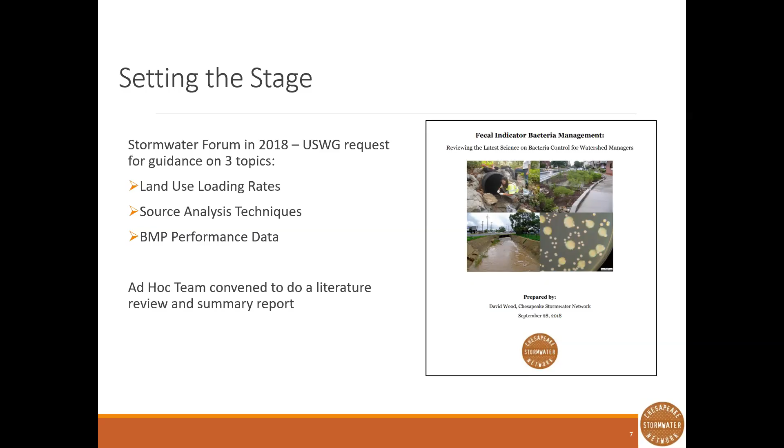So we put together an ad hoc team to do a literature review and summary report, which you can find on our website. A screenshot of it is on the page right now. But basically, I just wanted to touch on some of our findings because I think it's a pretty good segue into what Kim is going to be talking about today. And a lot of this, I think, you all who work in bacteria management probably already know, or at least anecdotally are familiar with, but was definitely confirmed as we looked through the literature.

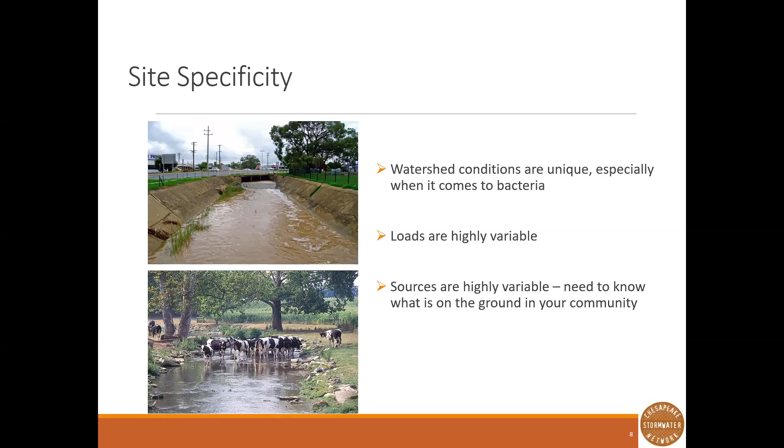And a lot of that is site specificity is really important for bacteria management. Watershed conditions are really unique, especially when it comes to bacteria, and so loads are highly variable. So it's very important to know what's on the ground in your community rather than making larger generalizations. And so, along those lines, when it comes to accounting for bacteria reductions, if it's under a regulatory framework or something like that, it's difficult to set something up the same way that we do for nutrients and sediments.

There is not really any support at this point for loading rates for fecal indicator bacteria based on monitoring data. So, you can't say that we have a certain number of colony forming units per acre of impervious cover or acre of row or turf grass or something like that. It's too variable across the landscape. And similarly, BMP removal data is highly variable as well.

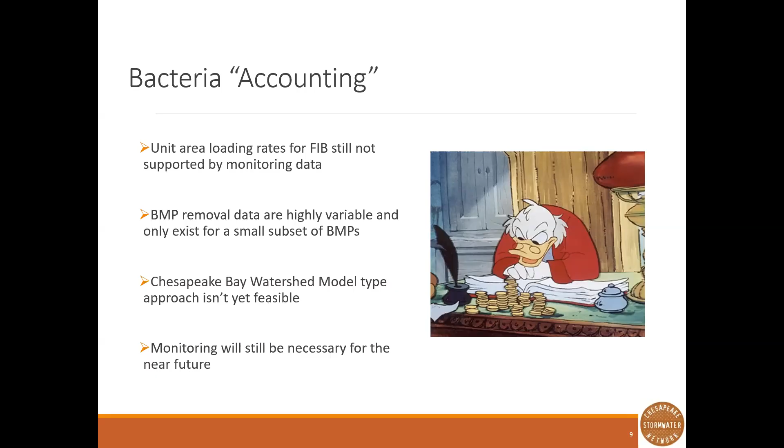There's a couple of BMPs that show some promise as far as providing reductions in bacteria, things like bioretention and some constructed wetlands, but there are a lot of site-specific factors that go into how effective those are, and field studies can show anything from almost 100% removal of bacteria to your green infrastructure practice actually being a source. If, for instance, geese land on your wet pond and you have an actual input going on. So the dynamics make it really difficult, and so monitoring is still going to be really important. It's really a combined approach that is still best practice.

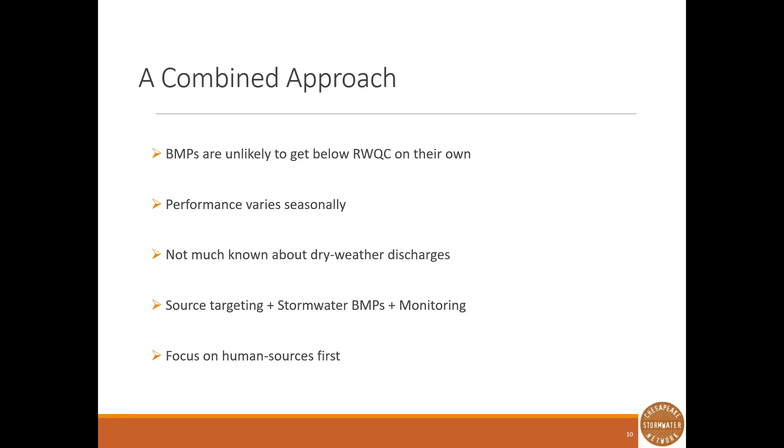There are still a lot of information gaps about seasonality. Dry weather discharges can be really spotty, as you know, and so a combined approach, looking at source targeting. Maybe you throw some BMPs in there, but they're probably not going to be doing a lot of the heavy lifting, and then you're monitoring. And so that brings us to our topic today, and that's really doing our sleuthing for bacteria sources. A lot of them are hidden in your existing infrastructure, so you have to do a lot of work to identify and track the sources for the biggest impact so that it's cost effective and also providing the public health benefits that you're looking for.

And so I have seen Kim give a version of this talk before and was very excited to have her on to talk about what they're doing in Baltimore City with regards to bacteria monitoring. And so I'm going to go ahead and introduce Kim now. Kim Grove is a professional engineer whose 20+ years of experience has spanned the spectrum of civil engineering, including stormwater management, land development design, environmental site assessment, remediation, geotechnical engineering, and forensic analysis.

...construction management, and materials testing. A graduate from the Florida Institute of Technology, Ms. Grove spent most of her career as a private engineering consultant, working throughout the Southeast and Mid-Atlantic region until she joined the Baltimore City Department of Public Works in December of 2010. Ms. Grove currently serves as the chief for the Office of Compliance and Laboratories, which is committed to enhancing environmental regulatory compliance for the department through collaboration, management program improvements, and regulatory enforcement.

So I'm very excited to welcome Kim, and you can go ahead and take it away. All right, thank you very much. And good afternoon. Thank you for taking the time to listen to this presentation on Baltimore's approach to bacteria monitoring and investigations.

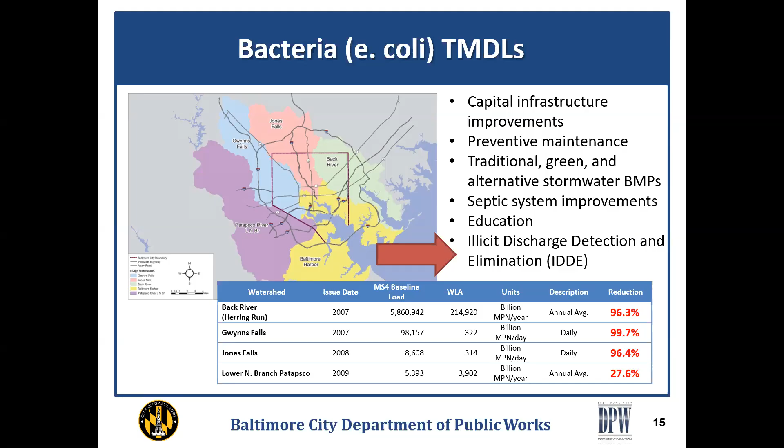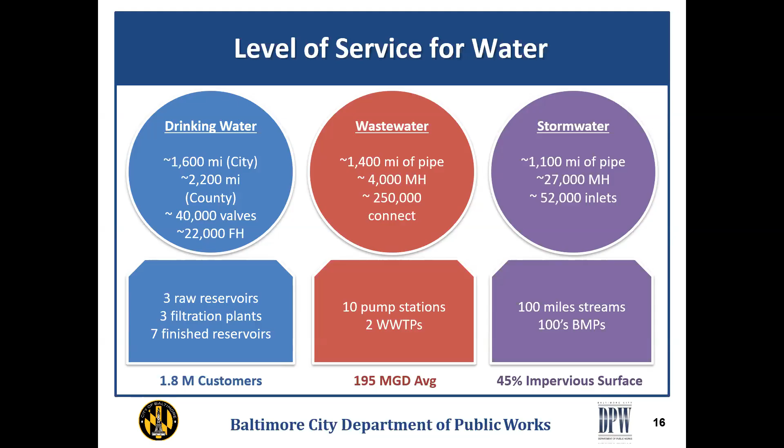So within the city, we have a lot of pipes. If you recall, I said that we were about 82 square miles, but collectively, we have almost 4,100 miles of drinking water, wastewater, and stormwater pipes crossing underneath our streets. So it's a very high density of pipe networks, and most of those pipes are past their life. So they're in bad shape, they are leaking, or they have enough cracks or separation at the joints that they're allowing for infiltration to occur. For the City of Baltimore, the Department of Public Works is a local government agency that acts like a regional utility.

On the previous slide, I had noted what we have for pipe networks within the city, but we're also responsible for the drinking water distribution that extends out to the counties, as well as providing drinking water for other surrounding counties. And then on the sanitary system, we operate 2 wastewater treatment plants. So our collection system is not only what is within the city, but also what we are collecting from the adjacent counties.

When it comes to IDDE, there are a lot of sections and divisions within the department that assist with the IDDE program. My Office of Compliance and Laboratories takes the lead at the beginning and at the end, meaning the detection and then the verification and elimination. But along the way, the Bureau of Water and Wastewater Utility Maintenance Division, the Office of Engineering and Construction, and the Office of Asset Management work together when we have to focus on that elimination part.

And then if the source of the illicit discharge is coming from a private property, then our Office of Legal and Regulatory Affairs may come in to assist with the enforcement of local laws that allow us to get a closer remedy. There is also a Department of Housing and Community Development, which is responsible for the plumbing codes and can also have authority to go onto properties. So they will assist us at times if we are dealing with private property owners. So it's not just about the pipes, it's also about the people when you want to develop a good IDDE program.

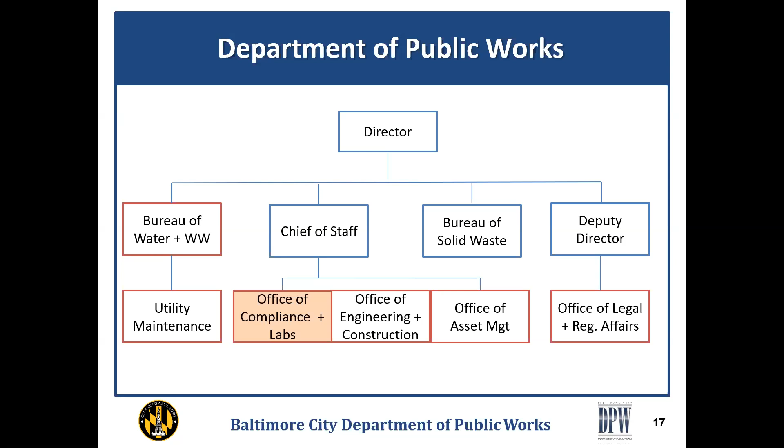Specifically within the Office of Compliance and Laboratories, the Water Quality Monitoring and Investigation section is responsible for IDDE. It's 13 positions that are scientists and engineers. We have a $2.2 million budget that is funded by the water utility, wastewater utility, and stormwater utility. And within that budget, it's mostly focused on operations, but we do have certain partnerships and volunteer programs that we assist. An example is some of the research that I'll be talking about later on related to microbial source tracking.

The bulk of our efforts go into a weekly screening program that we have at 88 locations where we monitor for the water quality indicators that are listed there on the right. But in addition to that, we also do a monthly stream impact sampling. In the spring, we'll do a biological assessment. We do have to respond to our non-emergency requests related to polluted waters.

As part of our MS4 permit compliance, we have to sample during storms. Related to our consent decree for SSOs, we do confirmation of abatement as well as large SSO sampling. On top of all that, this office is responsible for a flood alert management system of several stream gauges and rain gauges throughout the city. And we also provide education through our public school programs.

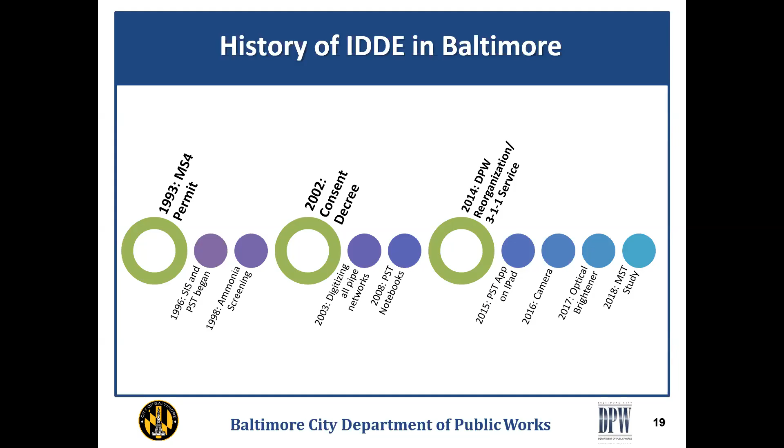Then, if you notice on this history, every year we were doing something new, either a new technology, like putting an application on an iPad, which was much more real time, adding more types of cameras for our staff to use. In 2017, we added an optical brightener piece of equipment as a supplement, because sometimes illicit discharges related to a sanitary discharge are not always about bacteria. Sometimes it can be related to detergents. And then finally, in 2018, we started our microbial source tracking study.

So our investigations, by and large, are started because of our routine sampling. And in the Chesapeake Bay program expert panel on IDDE for gray infrastructure, when they talk about an enhanced IDDE program, they really want to see something where you're not reacting to a complaint, but that you have a systematic methodology for detection.

And as you can see, we've done over 2,000 investigations since 2008, and the vast majority of them were started because of our program. And about 48% are done within 1 day. So when we have to do an investigation, a lot of times, because we have our protocols set, we can identify the source within 1 day. But I do want to let you know that 30% usually stop or no source is found. Not every investigation is going to end up where we can find it. And we average right now about 180 investigations per year.

So in addition to our routine sampling, we have a dedicated group of about 5 field scientists who are routinely focused on these investigations, plus an engineer who can help work through what the remedies may be. And these are just some of the statistics coming off of our hotline, or 311 for polluted waters. What this all comes down to is about 1 in every 20 calls that we get may actually result in an illicit discharge being found. And I just want you to note how few complaints we were seeing in 2019. Keep that thought in mind, because we're going to come back to it later on in this presentation.

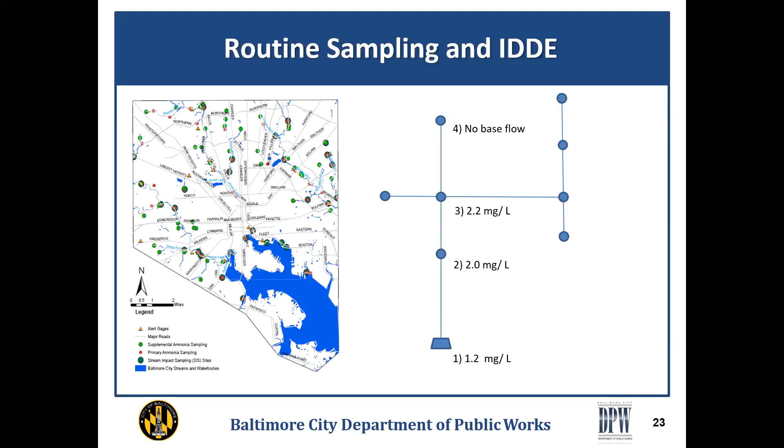If we went to the west and found a lower ammonia reading, that's not where we would go. So if we headed east, still seeing it come up high, that would be making sense, but heading south, that would show us that the illicit discharge was not coming from the south. We would then move north and see a very high discharge. It would say that we're getting closer.

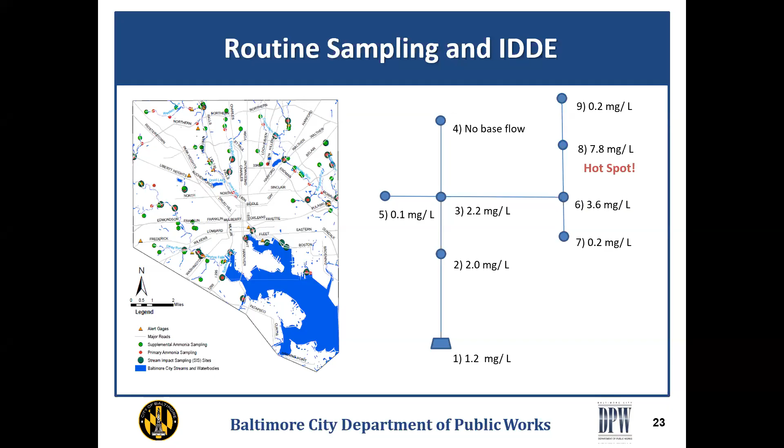Going up one more part, we would see that, oh, that ammonia has come down. So then that would identify that that manhole is our hot spot. That is the area that we would want to concentrate. And this type of backtracking and looking at the ammonia screening, we call this a phase 1 of our pollution source tracking. And we would then move into a phase 2, which is a visual assessment tool.

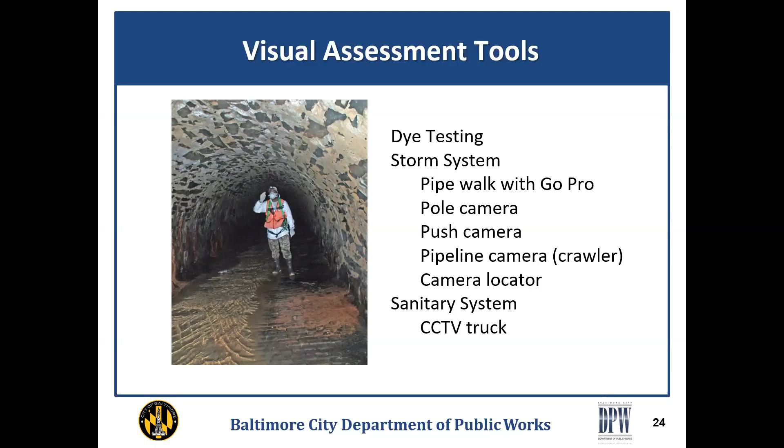And then if we can, we work with our utility maintenance division so that they may CCTV the sanitary system to see if there's any cracks or anything within that sanitary system. A traditional dye test would be done where you would deploy the dye into one manhole, you would wait, and then hopefully you would see it show up in the storm manhole downstream.

However, what that does is it just allows you to see the dye going across that length in between those two sanitary manholes, that's where it's coming from, but you're not quite sure where within that 400 length you may be seeing it. And what we started to see is that if we just said it was a segment in between the two manholes, the cost of that repair was pretty high.

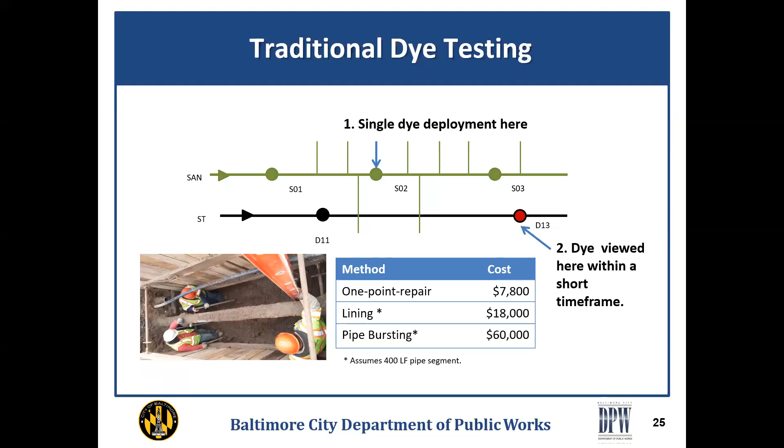So we tried to look at different ways where we could pinpoint it down to only a small location and get a one-point repair. If you're lucky and you're able to do the CCTV and you can find that crack, it's easy to identify the one-point repair. But there are times where the crack may be submerged with the base flow within the sanitary system, or it may be minor and not able to be picked up by the CCTV. So that's why we started to look at different alternates.

And this is one of our great low-tech ways of doing it. Instead of just pouring all of the dye, we have created almost a tea bag of dye solution, and we attach it to an empty bottle. And then what will be done is we will pull the bag along about 5 feet, wait some time, see if we're seeing any dye, pull it another 5

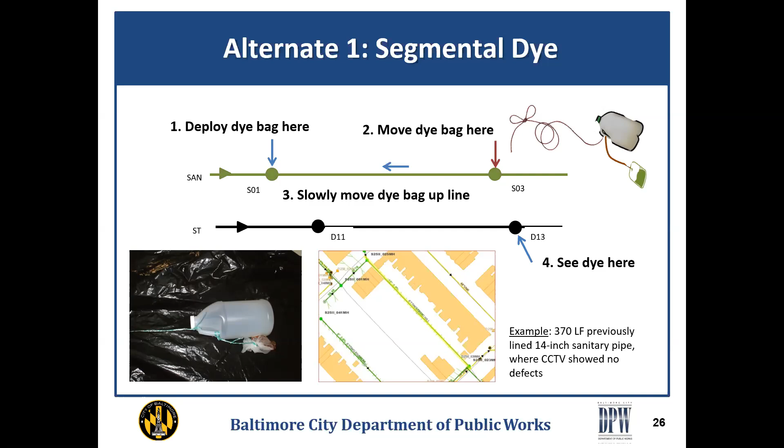feet, and then keep continuing on until we get to a point where the introduction of that dye within the sanitary system starts to show into the stormwater system, and that helps us to pinpoint where we should be looking for the break within the sanitary system. And this is just a visual of how that tea bag looks.

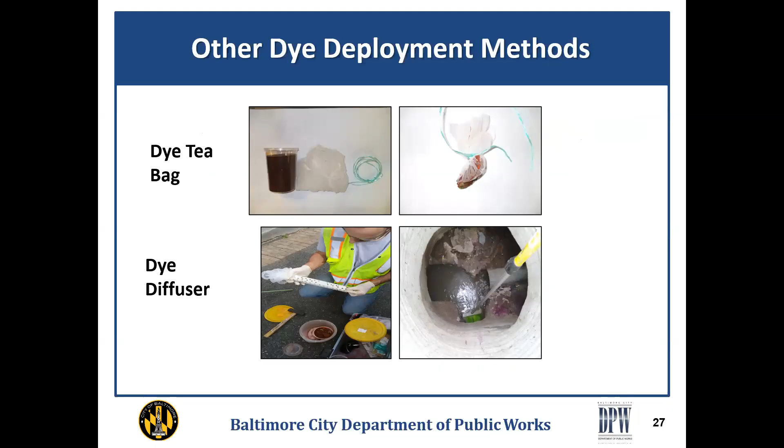We've also developed a very low-tech dye diffuser, which allows for us to introduce dye within the manhole if you've got multiple ways for the sanitary system connections to be happening. So another alternate that we've had to employ is actually a mass dye.

And this particular time, we had an introduction of illicit discharge within the stream, and it wasn't coming from the adjacent pipe. So we had to do a mass dye deployment from certain locations to finally understand that the break was happening further up in the system, but it was coming through the underdrain within the sanitary system.

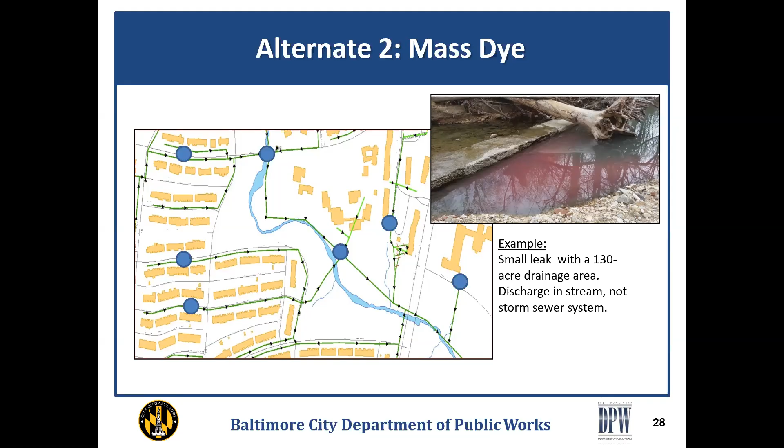And then another alternate that we looked at is this scenario where the adjacent sanitary system next to the storm system was not the part where the illicit discharge was coming from. It was actually from a concurrent sanitary system or a parallel sanitary system, but it was almost a block up. So what we had to do was introduce the dye and then keep a flow monitoring camera to wait almost 24 hours to see when that dye came in.

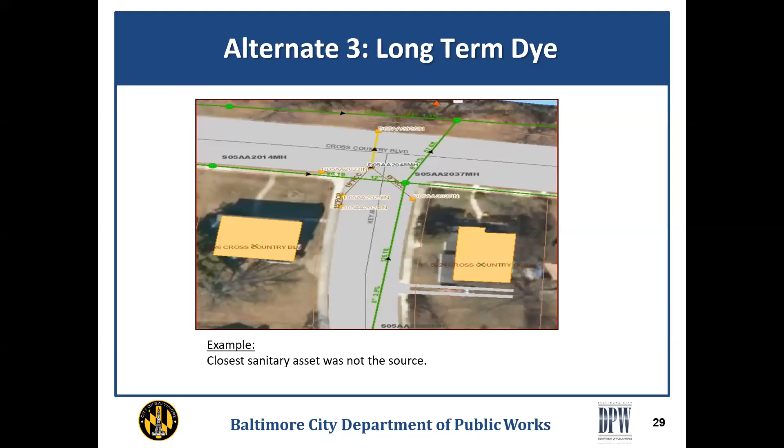Because what was happening is there was a break within the sanitary system. It was coming through some of the gravel that is under the underbed, and then finally connecting into the storm drain system. And when you're in an urban area with so many different pipe networks, that gravel bedding really plays a confusing complication in trying to backtrack where your illicit discharge is coming from. It almost mimics a karst terrain.

So this is one last case study that we had. This was in a downtown area of the city. In addition to our routine sampling, we had been doing outfall sampling along the harbor and saw very high ammonia nitrogen levels. So we backtracked it a couple of blocks, but we did the dye testing just within the public system. We couldn't see any introduction of the dye, but the ammonia levels, and we also had it verified with bacteria tests, were showing that there was some type of sewage coming into our storm drain system.

So this investigation took several weeks. It was very complicated because you're in the downtown area, so the maintenance of traffic was difficult. Even though the services may be one or two services to the building, there were a lot of different storefronts and fixtures that could have had that introduction.

Long story short, what we found was it was actually a high-rise condominium, and a quarter of the condos had their plumbing system connect into the storm downspout. So you would have never seen it in any type of connection to the main part of the storm drain system. And the only way we found it is that we thought to not just introduce dye at the base level, but to try various apartments within that high-rise.

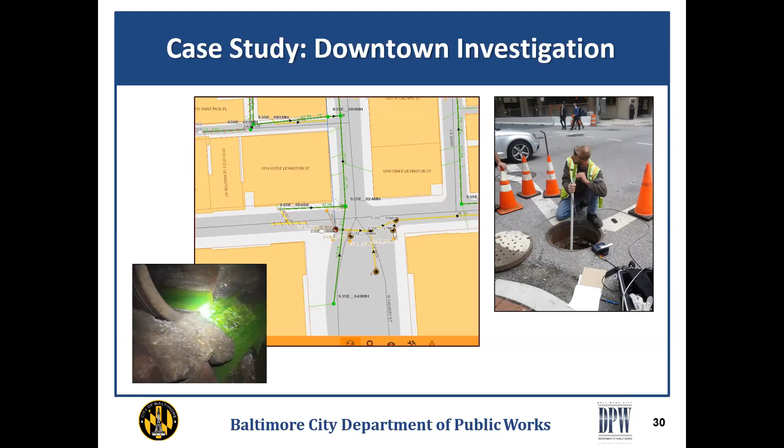So finding the source of your illicit discharge is one part, but that's almost the easy part; as the data showed, a lot of times we can find that source within one day. And when we backtrack that source to actually being on a private property, that's where things really take a different turn, and communication starts to become our greatest tool. Usually we'll go through the routine of notification, then educating before we go into enforcement, and then abatement. But you have to be ready to have communication in several forms: email, person-to-person talking, phone calls, direct mail.

And at this point, that means communication will likely happen outside of the normal work hours of 8:30 to 4:30. If you're lucky, just the notification can go to abatement. But through our experience, we find that education and enforcement, more education tends to be effective, and then finally the enforcement side of it.

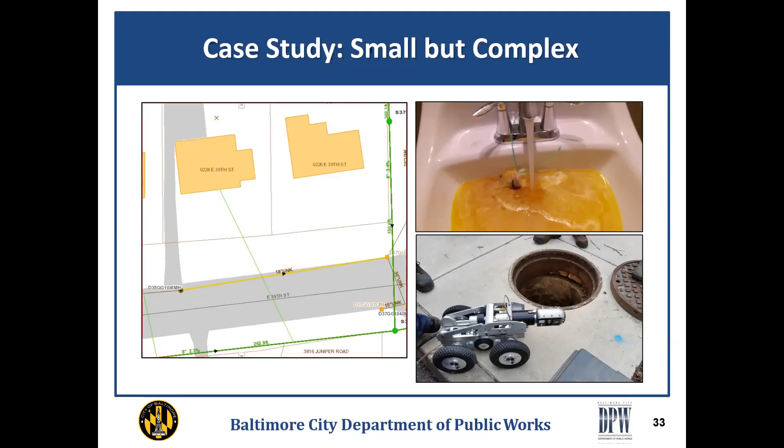And this was also very difficult because their plumber was showing that he had CCTV'd and was not seeing any large cracks, but dye tests were showing a different story. We also noticed that the dye wasn't coming into our storm system through any crack within the storm system. Instead, it was releasing to their private downspout connection. This took a few months to remedy, but the continued communication with the property owner really paid off for us. So there will be times when we use all the tools in our toolbox and we're still not finding the source.

And this is when microbial source tracking has come into play. We have been working with the University of Maryland, Baltimore County, as well as the University of Baltimore in trying to do this work. What we have recognized, though, is that microbial source tracking isn't your step one. It's not even your step two. It should be used when you've exhausted everything else.

What we did was we started to compare some of our known samples and also some of our locations where we knew that there was no sanitary sewage coming in to try and establish what we wanted for a threshold. And for us, we used the human markers being at less than 1% to say whether or not we would continue an investigation. Through 2 fiscal years worth of sampling, we were actually able to stop 14 of our 20 PST investigations just based on that threshold.

But there have been other times where the data came back and we could see that a large portion of the bacteria that we were seeing was related to canine. And so that enabled us to say, okay, we need to stop searching at the sewage and we need to possibly look at education related to pet waste management.

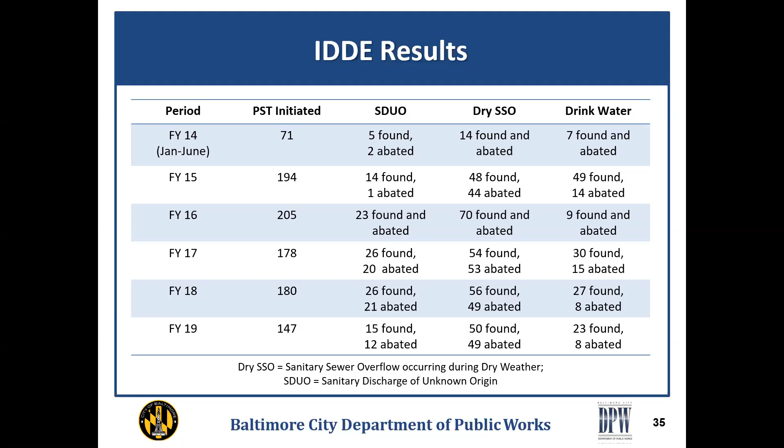Now, because we are in the Chesapeake Bay watershed, we have used the expert panel recommendations to take some of the results from our IDDE program and translate that into a removal or reduction of nitrogen or phosphorus. When we did that, we only focused on those discharges that we found from either our routine sampling or our special studies, not anything that was a complaint response. And we really focused on the large discharges that we found for sewage exfiltration or drinking water transmission, plus any of the sanitary direct connections that we were able to find through our program.

But at the end of the day, we have to come back to why are we trying to do this? And we are trying to get a reduction in bacteria so that we can eventually use our waters for swimming and fishing. So within the state of Maryland, there is criteria set related to your fecal indicator as well as water quality indicators. And this is just a sample of what we include each year in our annual report.

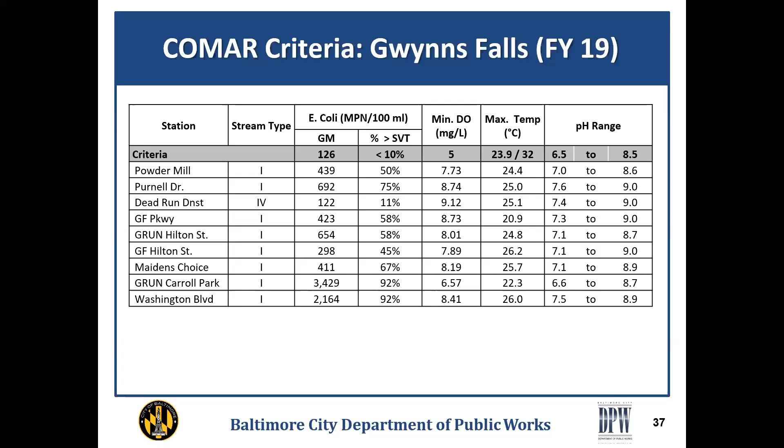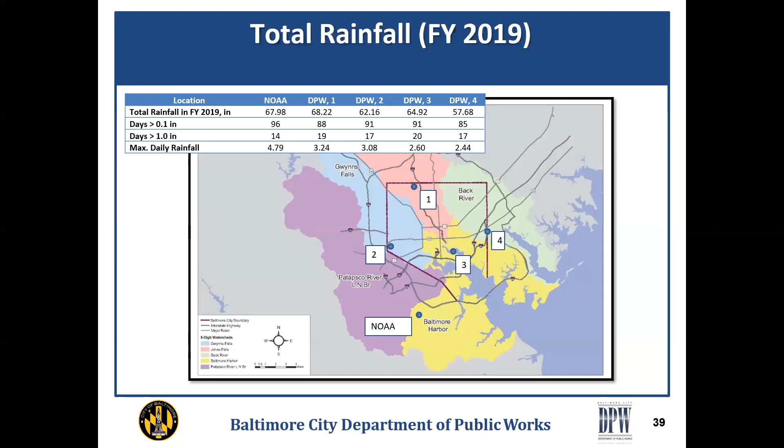Really, for this purpose, what made me realize was that when I want to look at rainfall data, I might want to go a little bit more localized to where I'm seeing the result rather than staying with a national weather station, because in an urban area you can see that much of a variation. And so this is just one way that we're starting to look at our data.

It's that same watershed that I was referencing before. This is Gwynns Falls, and it's the stream impact sampling data. But instead of trying to show each of the sampling locations separately, what I'm showing is each sampling event and how there might be variation within the bacteria results, and then trying to compare that with the rainfall.

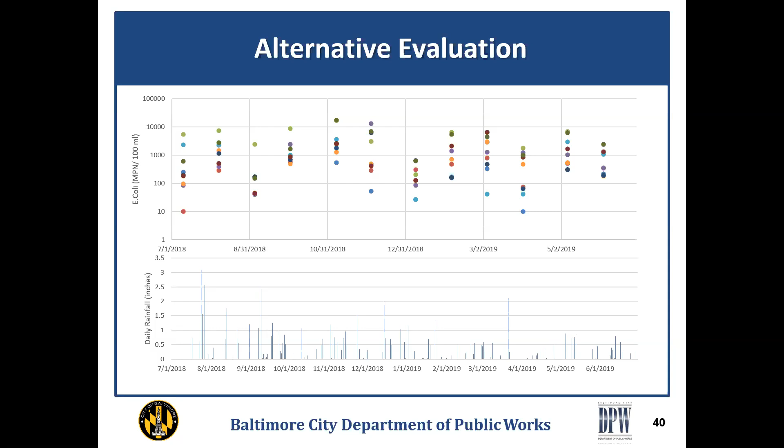Now, bacteria is not solely related to rainfall. In fact, there's a little bit of a balance, because depending on how the rainstorm is happening, you may have more introduction of bacteria because of the sanitary sewer overflow, or you could have a greater dilution. So the next part we're going to bring into this evaluation is any of the reported SSOs. We have that data for the city, but I also need to get the data for the county, because this watershed has a significant amount within the county.

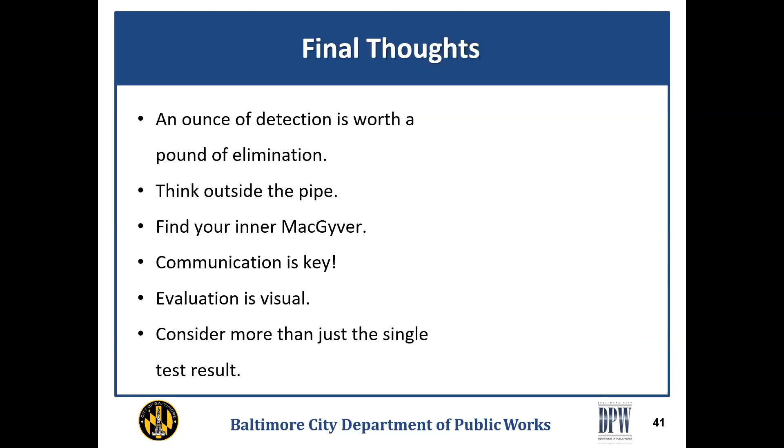So the final thoughts that we have. IDDE is a fantastic practice to use if you are trying to reduce bacteria within your waterways, especially if you have evidence that the bacteria is related to sewage or humans. But I'm going to say, think outside the pipe. There will be times where it's not always your closest pipe that is your culprit. And I definitely recommend to find your inner MacGyver, because every solution does not have to be a high-tech solution. There's a lot of low-tech solutions available that can get you your answers.

Along the entire part of the process, communication is a vital tool. And when you want to look at how successful your performance may be, how you may visually demonstrate it should be considered. And I would really welcome any collaboration of other municipalities or consultants that have started to look at those results and would want to think through different ways we can evaluate it, because when we're talking about performance with TMDL compliance, this is not going to be the same way that we would look at something like nitrogen or phosphorus. And that's why it's important to consider more than just the test results of bacteria when we are trying to evaluate our performance.